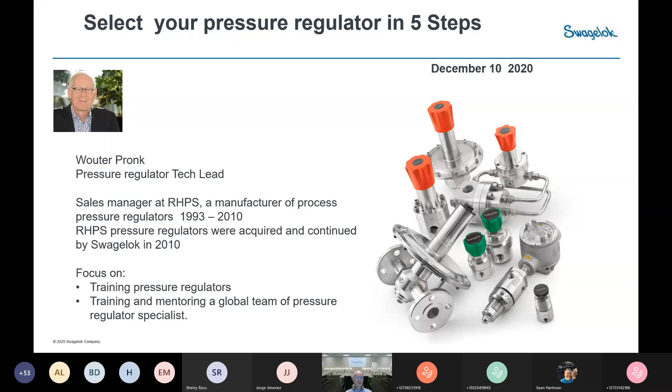Today we will talk about how to select a regulator in 5 steps and try to avoid mistakes. Step 1 is be aware of the correct process information: pressure, temperature, flow and material. So what do we want to control? Do we want to control upstream or downstream pressure? Realize the natural behavior and performance of a regulator. Don't think that we can create a regulator which is set at a certain pressure and will keep that pressure without any fluctuation, so lock-up, supply pressure effect and droop will be subject today. Select the correct loading element: are we going to use a spring-loaded regulator, a mix of both, or a dome-loaded? And a little bit of troubleshooting, filtration and safety valves.

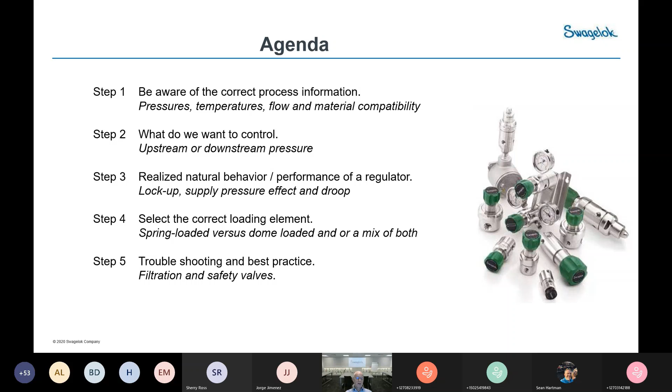What's really important is that if you want to use a pressure regulator, we start with all the information we need. Without all the information, we can't do a proper selection of a regulator. We want to know, are we going to control a liquid or a gas? If it is a gas, we must realize that a pressure regulator can handle much more flow of a gas with a low density than it can handle a gas with a high density. So think about the difference between air, nitrogen and hydrogen. Hydrogen will do approximately 3.8 times more than air. So if you select a regulator which should do, by example, 380 normal cubic meters of hydrogen, you can compare it with a regulator which can do 100 normal cubic meters of nitrogen.

So please forgive me about the units I use. I'm 100% used to normal cubic meters, and I try to use PSI as much as possible. So how do we select regulators? I like to work with flow curves, and we will talk about flow curves more and more, because flow curves are the best tool which can be used to select regulators, because basically what you see is what you get.

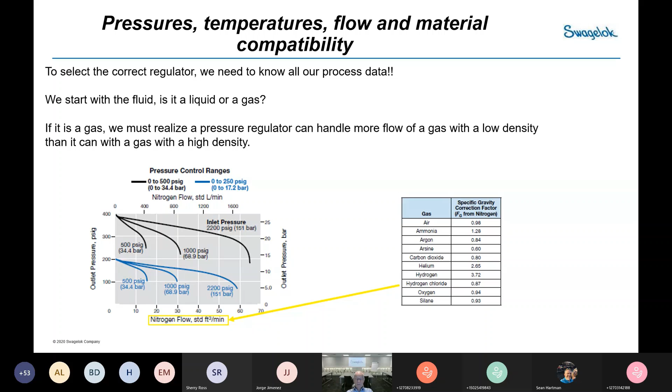What are the things we all need to know? We need to know the maximum and minimum inlet pressure of a regulator. Think about a cylinder: it will start at 3000 psi approximately, but it will decline to a lower pressure. I still have to find the first cylinder which will stay at 3000 psi, so it will decline.

And if the pressure declines inside the regulator, you will see immediately the supply pressure effect. Now what is supply pressure effect? We'll talk about it later, but if this is your inlet pressure and this is your outlet pressure, if your inlet pressure drops, your outlet pressure will go up.

So it's important for us to know the outlet pressure and how accurate it must be. This is to select the correct diaphragm size. Is the outlet pressure also related to the flow capacity we need? So do we expect that the outlet pressure is the same at all flows - the minimal flow, normal flow, maximum flow? Sometimes the specification of a process is given in the minimal, normal and maximum flow.

We also need to know the preferable flow the process needs. So is it given in standard liters per minute? Is it given in normal cubic meters per hour, in standard cubic feet per minute? Or maybe in a mass flow. In a mass flow, we recalculate it into volume flow, because that's where our calculations are based on. So in liquids, we like to work with liters per minute, because it's not compressible.

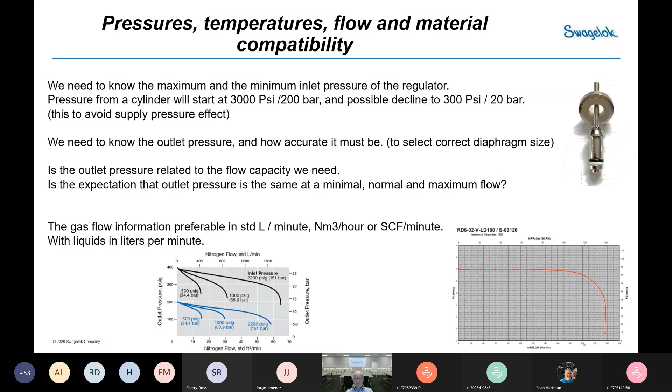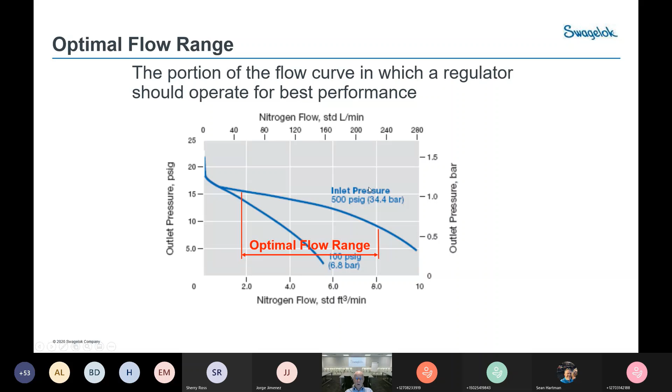So thinking about the flow curve, where do we want to be in the flow curve? Which regulator can we select? If this is a typical flow curve, this is the flow, and I like to be in the most horizontal part of the flow curve. So in this part, I don't want to be in the first part where we see the lock up, to be explained later, and I don't want to be at the end of the flow curve where we are in choke flow. That's not the place to be. I like to be in the middle flat section.

So talking about a flow curve, how do we select it and how does it work? At this side of the X we see the outlet pressure given in PSI. This side we can see it in bars, and believe it or not, in Germany the bars are at the left side and the PSI at the right side. On top we see the flow in normal cubic meters per hour, and at the bottom side we see the flow in standard cubic feet per minute.

Really important to know, these flow curves are made for or with nitrogen. So on our flow test benches, we work with nitrogen - we have no flow test bench to make the flow curves in hydrogen. So in a flow curve you see several lines, which are the flow curves.

So if I want to select and to see if a regulator I want to use can do the job, I have to find the correct flow curves. You see a lot of lines in this flow curve - maybe confusing, but it's not that difficult. So I just want to start an example. So what is the pressure drop?

So if we start using a regulator and there is no flow, and we increase the flow from 0 to 150 normal cubic meters per hour, what will happen with my outlet pressure? I start setting my regulator at 250 psi static situation, and the inlet pressure of my regulator is 507 psi. So how do I select and how can I see what's happening with my regulator?

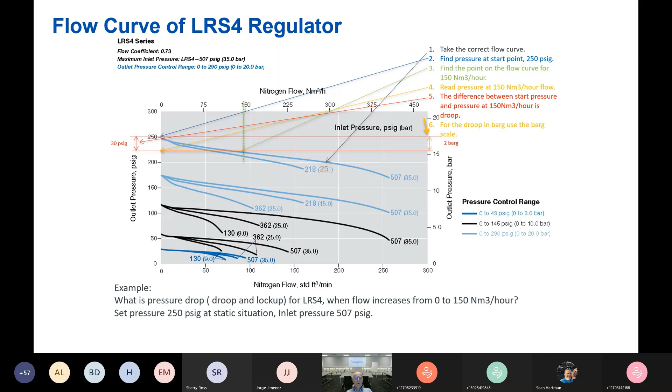So that's a theoretical flow curve. Most flow curves we show in our documentation are flow curves which are really made by a flow test bench, but on the bigger sizes we are not always able to do this. The flow curve generator will give you the opportunity to select a flow curve which is really according to your process.

How do you want to control the regulator? Do we want to control it with a diaphragm, or do we want to control it with a piston? Regulators on the low pressure are controlled and measure the outlet pressure with a diaphragm, but regulators with a high outlet pressure measure the outlet pressure with a piston.

Why is this? Because of the area of your diaphragm and all the force which works against it from the outlet pressure, there is a lot of force on top of the diaphragm. So we need to compensate that with a spring, which we use to set the pressure. If this outlet pressure is too high, we can't handle it, so we need to make the sensing element smaller. The only way we can do that in the standard regulators is to use a piston with a smaller diameter.

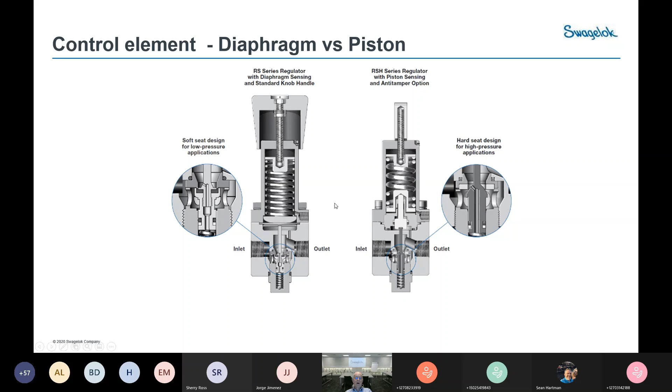So why do we use the piston, and when do we use the piston? We use the piston to control higher pressures and outlet pressures.

If I select a regulator, I prefer to have a regulator with a very large diaphragm and a very small seat - the diaphragm as big as possible and the seat as small as possible. Why? Because it gives you better repeatability and more sensitivity.

You can imagine that if I set a regulator at a certain point, at a certain process data, and there is a change in the inlet pressure or a change in the flow, it will run away a little bit from the set pressure, which you can see in the flow curves. But if we go back to the original situation, the repeatability of a regulator will show that it can come back to the original state.

And if we talk about sensitivity, it's important that the regulator can respond to small changes in the process. Think about a blanketing process where we talk about millibars or small inches of water of change - we don't want to see big changes in there. So I like to have a very nice and big sensitive regulator.

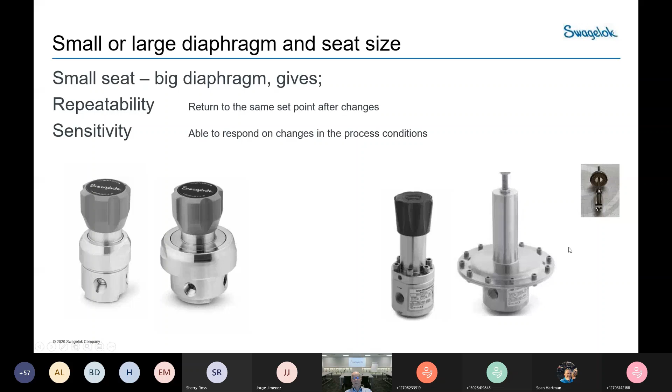So it's a standard regulator. This regulator is a standard regulator, but we have the same versions with bigger diaphragms like this one, and you see it's a big diaphragm, so we can't control a very high outlet pressure. A big diaphragm is always related to lower outlet pressures.

Temperatures - something which is really important for us. Think about an application where we reduce a lot of pressure, you will see the Joule-Thomson effect. And the Joule-Thomson effect is basically where we reduce pressure in a gas, and if there is a reduction in gas, we need warmth or heat - basically we need heat to reduce the gas.

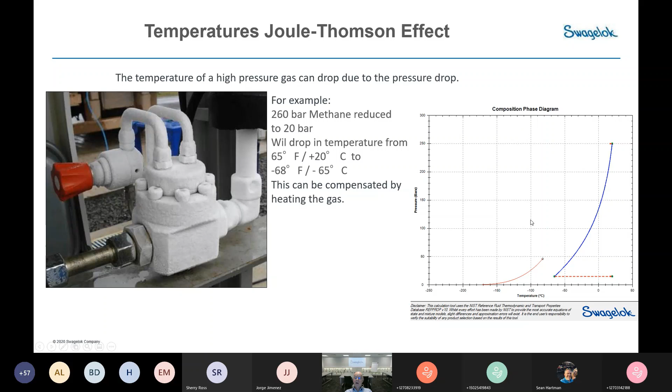So that's a lot of pressure drop. We can calculate the Joule-Thomson effect, and we can also calculate the heat we need to compensate for this.

Material compatibility is really important to select the correct materials, because in our regulators we use materials like elastomers, diaphragms, O-rings, and also several other materials.

Where do we see the issues with compatibility? As I just talked about the Joule-Thomson effect, we have to realize that the regulators must be built with the correct materials. If you really want to use a regulator in very low temperatures, maybe we have an issue with the elastomers and the polymers. We have to be sure that the fluid is compatible with the materials.

So this is a nice example where the diaphragms were not compatible with the material. It started swelling, and it was damaged.

Pressures. If you think about high pressures and big diaphragms, we have to be sure that the design is good enough for higher pressures. So compatibility does not only stop with the chemical attack of materials, but also in the situation where the materials are not compatible with your application.

What about process conditions, erosion and cavitation? I like to show this one, and I'm not really proud about it, but this customer was using this back pressure regulator in a situation with a methanol injection system, and the damage you see on this material was caused by erosion. It was only a few hours and it was already in this state. So this is a component of a regulator which was basically selected in the wrong way.

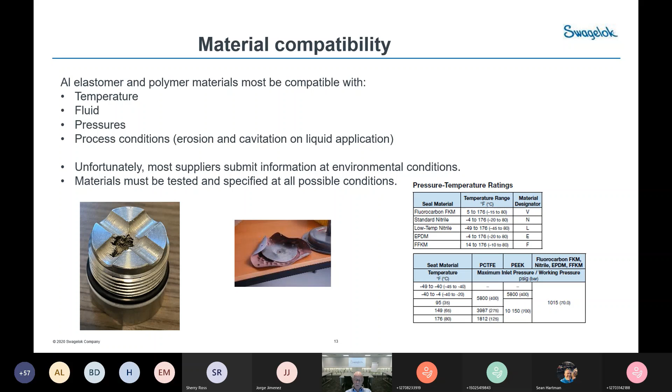So are we controlling? Sorry.

What would cause cavitation in a regulator? Cavitation in a regulator is basically caused by a big pressure drop, and it only happens in liquids. If there's a big pressure drop, you get implosions, and the implosions eat away the material. It's erosion by cavitation.

Another step, are we controlling upstream or downstream? This is a simple process. A lot of people look at the process like this - this is basically my process, and the process is asking for the maximum capacity of flow. So it's not us giving you the flow. No, the process needs a certain flow, and we need to find a regulator which can handle that flow under the worst scenario.

So if this cylinder drops from 200 bar or 3000 psi to a much lower pressure, then I have to calculate the size of that regulator. I have to size it on the worst case scenario. The same with back pressure.

In most cases we see either a pressure reducing regulator or a back pressure regulator. A pressure reducing regulator controls downstream pressure, so it's controlling the pressure in the process, and a back pressure regulator is controlling the maximum pressure inside the process. If the pressure is too high in the process, the back pressure regulator will open. If the pressure is too low, the pressure reducing regulator will supply the gas. So it's important that we know what we are controlling, and we see a lot of misunderstanding on the naming of a pressure reducing regulator versus a back pressure regulator.

A lot of people give the wrong information regarding the naming, and just by looking at the process conditions, we can figure out whether this is a back pressure regulator or a pressure reducing regulator, or the other way around.

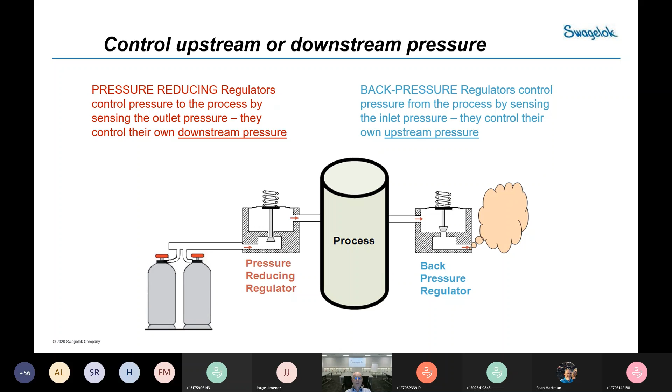Regarding back pressure regulators, I like to say one thing. A lot of people think a back pressure regulator can be replaced with a safety relief valve or a relief valve. Please don't do it. You will get a lot of chattering, hammering, and noises, because back pressure regulators are built to constantly control a pressure which is too high, so they can easily vent off a little bit and then close again. Safety relief valves have a very small sensitive element, and they open, bam, bam, and close again. So it won't work as good. Back pressure regulators work better than safety relief valves.

Now, how does a regulator work? Basically, in a regulator, you will find a control element - the seat and the poppet. The seat and poppet will open or be closed. And we measure with our load and sensing element. With the range spring, we control the force on the load on the diaphragm. And with the diaphragm, we measure the outlet pressure.

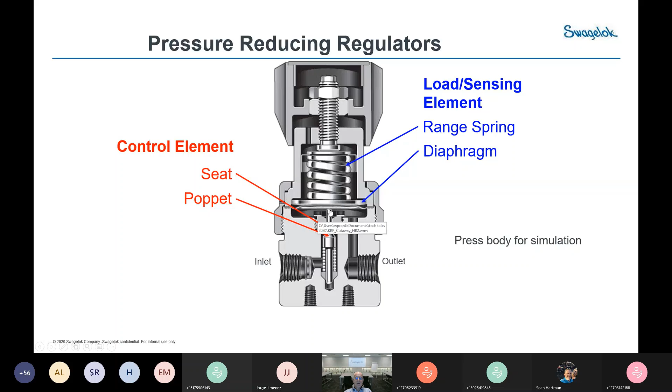So I will continue. If we set a pressure, the inlet pressure will come through the seat, and when the outlet pressure is against the diaphragm, you will try to find a balance with the spring force which is on top. And the spring force we all know about, because we screw in that knob and create that force on top. I've got a small simulation of a regulator.

So here you see an analytical regulator. You see the inlet pressure, the valve opens, there is a flow. And if we unscrew the spring, or unscrew the set knob, and so reduce the force from the spring, the regulator will be closed.

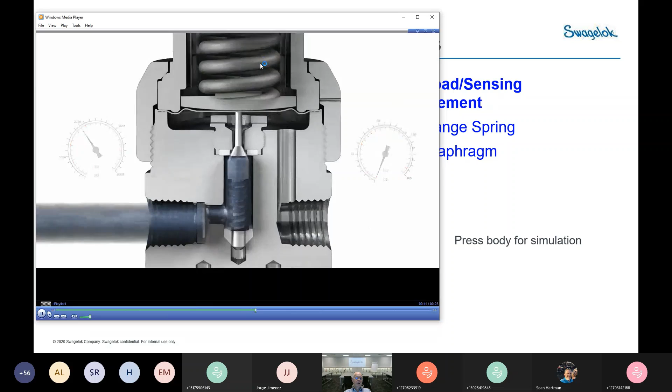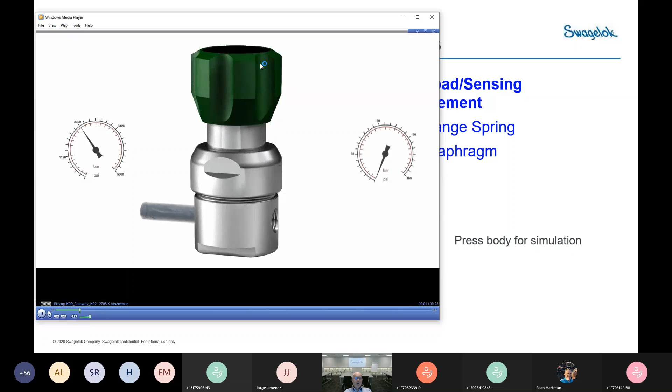A lot of people think that regulators are controlling, opening and closing all the time. Normal regulators in a constant flow situation are working at an opening of approximately 30%. So please be aware that if you do a calculation for a CV value of a regulator, please don't work with the CV values.

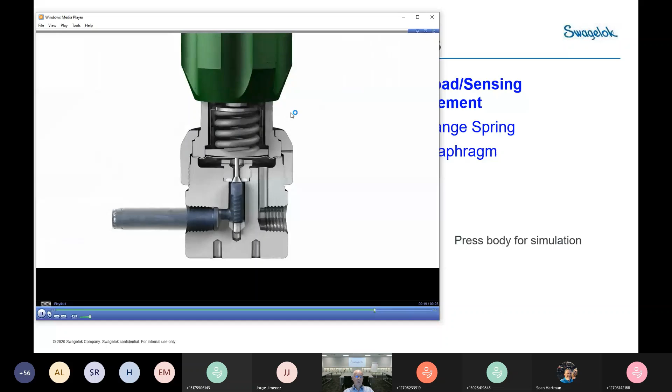CV values are just there to compare sizes of a regulator. In a regulator, we control a pressure, we don't control a flow. So if you use a flow control program, one used to size a flow control valve, and it gives you the CV value, you've got the wrong value for a pressure control regulator, which will be opening approximately 30%. So if you use the wrong program, you have to divide your value by 3 and you find approximately your CV value.

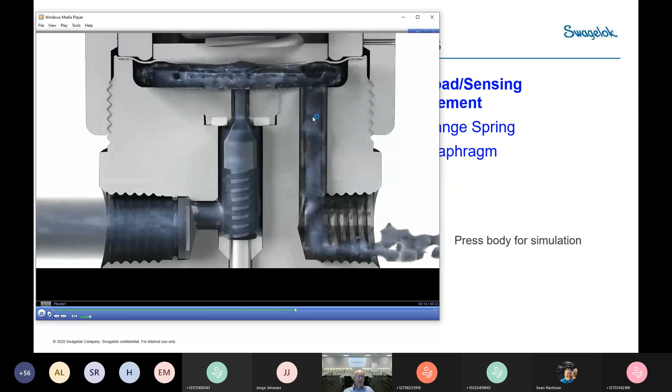In my sales life, I very often got the question: Wouter, I've got this regulator which has a CV of 1, it's not working well, do you have a better one? Because a competitor made a mistake. Then my question is always, what's the worst case scenario? So we did the calculation, and most of the time we found out that they needed a bigger regulator.

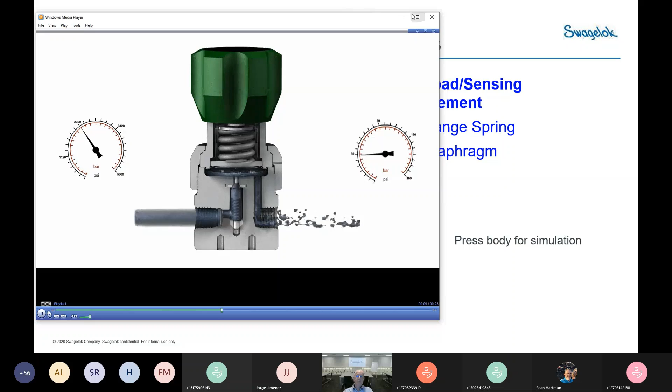So please be aware of this. In a regulator, we see basically only forces. Which forces are in a regulator? First of all, the spring force - that's the force we create by turning the knob, by compressing the spring.

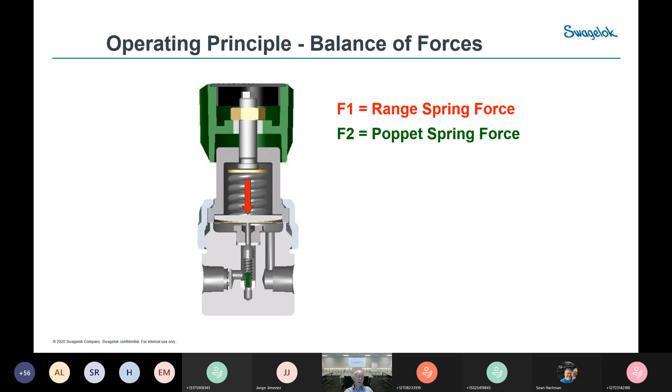Then there is a small poppet spring, and that poppet spring should be there because it's there to keep the poppet closed into the seat - just enough force to keep that poppet closed. A lot of people think that regulators have issues with leakage with high inlet pressures. Now, regulators love high inlet pressures, because that inlet pressure force helps them to close the poppet into the seat.

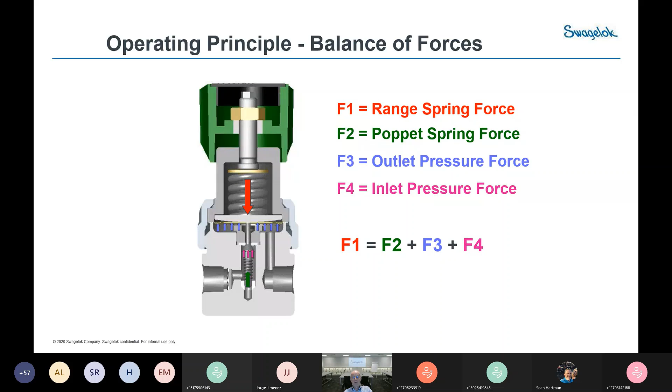So the last two forces we will find are the outlet pressure force and the inlet pressure force. The outlet pressure force is the outlet pressure pushing up the diaphragm, and the inlet pressure force is the force which the inlet pressure creates against the poppet. They all should be in balance. So it's a simple equation - if you change something in this equation, something else has to change as well.

Back pressure regulators. How does it work? It's the opposite way. In a back pressure valve, we still create a force on top of a diaphragm. This is your process which you like to control. If the pressure is too high in this process, it will work against the diaphragm. The diaphragm will be pushed up against the spring force based on the set pressure. It will slowly flow away to the outlet. There will be a balance again, and the back pressure regulator will close.

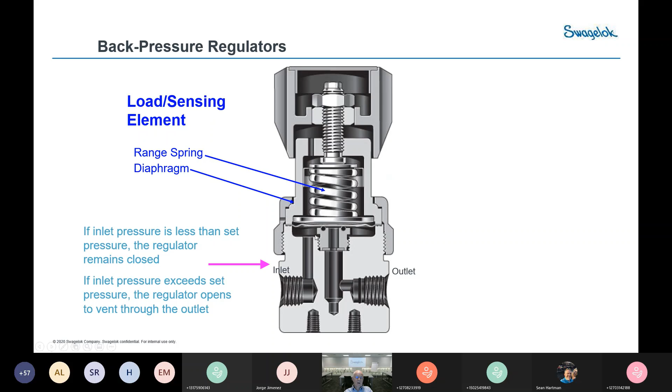Performance of a regulator. We talked before about the flow curve, and again I like to go into it. The first part of the flow curve is the lock-up zone. We will talk about that. We've got the second part, which is the droop area, and the last part is the choked flow.

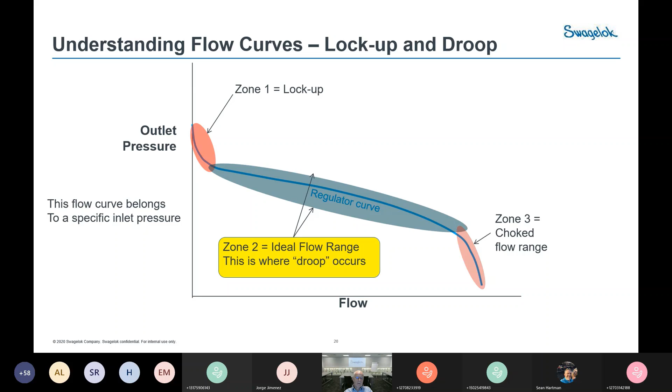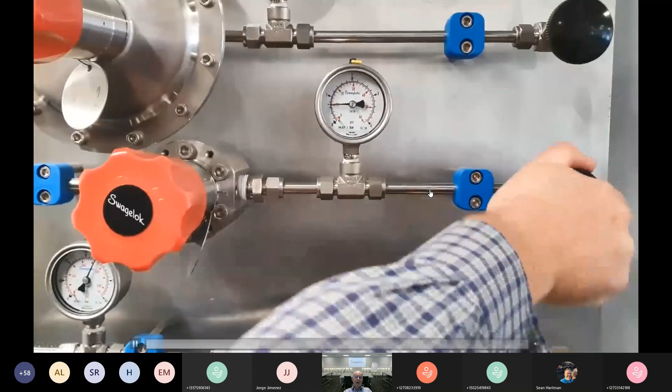If I open this valve, you will see that the pressure is declining. I selected the regulator with a nice lock-up so that you can clearly see it. So I'm going to open my downstream valve. You'll see when I go from static to dynamic, I will see lock-up. This is the lock-up effect. Each regulator has it a little bit. Do we like it? No, we don't like it. You can avoid it by selecting a different regulator, but this is the effect which we call lock-up.

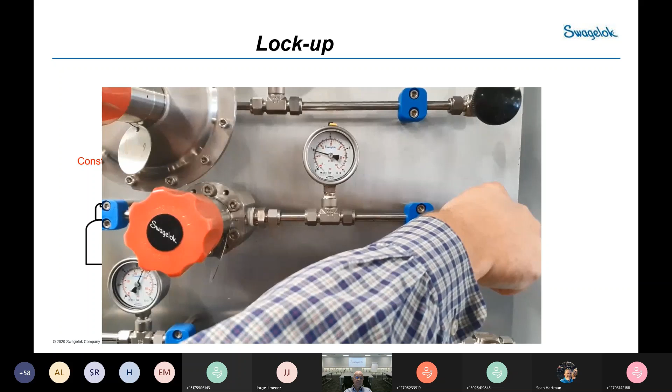Where does it come from? Again, I go back to the forces. The lock-up comes from the forces created by my poppet spring, the F2, which is created by my F4, that's the inlet pressure force. So the higher the forces, the more force you need to open this valve. So the more lock-up you have.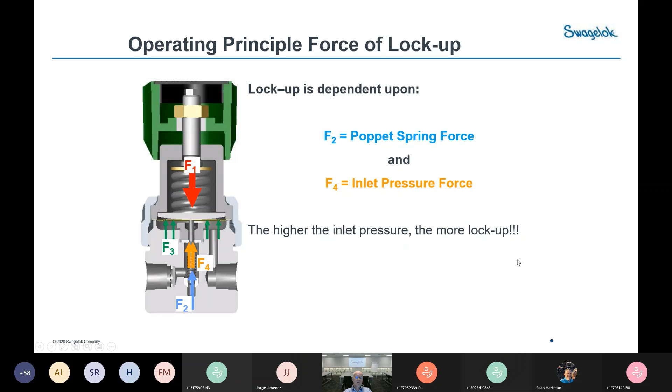Then another effect, which I also talked about, supply pressure effect. If your regulator is seeing a declining inlet pressure - so again I go back to my pointer, which unfortunately I can't use for this kind of training, but I can use it for other purposes - so if my inlet pressure drops, my outlet pressure goes up. In the example I will show you on this panel, the inlet pressure declines from 34 bar to 6 bar, and my outlet pressure increases from 1.6 to 2 bar.

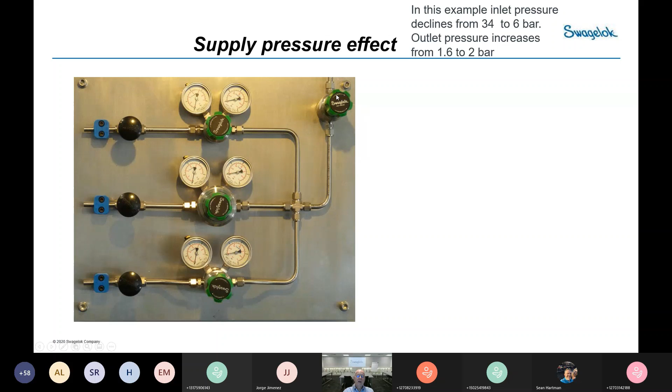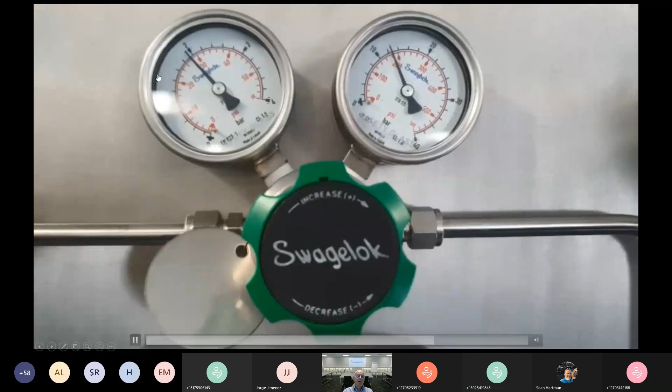The outlet pressure. So I will show this in this example. So what we're going to do? This is my regulator. It is set at a certain pressure, set at 1.6 bar. I decrease my pressure with this inlet pressure regulator, and we will see that the outlet pressure goes up. So the inlet pressure is decreasing. You can see that my outlet pressure is increasing.

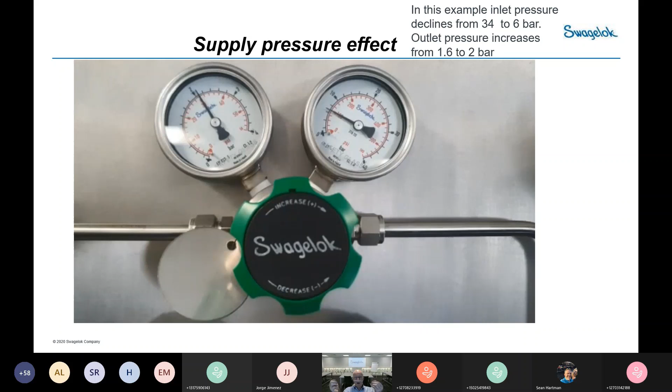What is changing if my inlet pressure decreases? If my inlet pressure decreases, that's basically my F4. So if my F4 decreases, that force will go down. I'm not touching the knob, I'm not touching my set spring. So something else has to go up. So what can go up? My F3. So basically this equation again explains the balancing of forces inside the regulator.

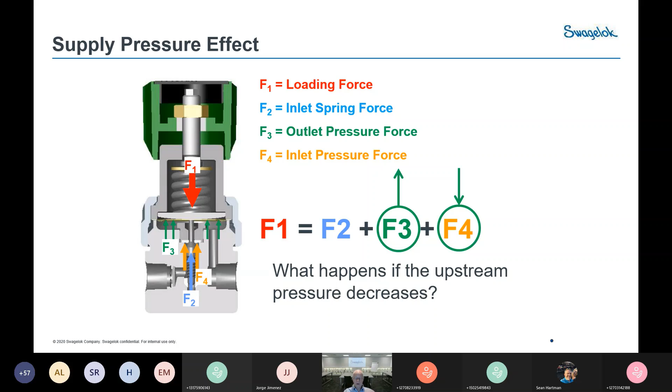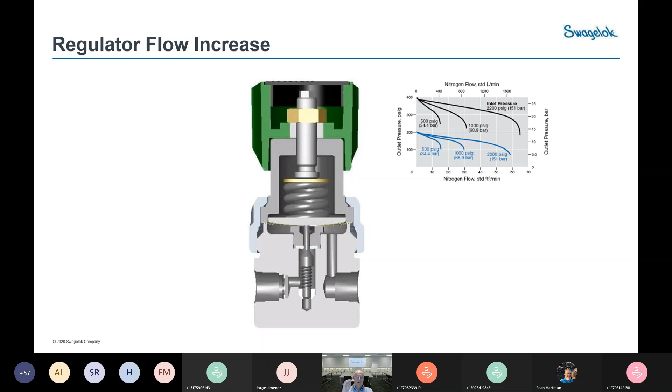Then the other effect: regulator flow increases, and what we see is droop. The droop can be seen inside my flow curves. So if we go from this point to a point further on the flow curve, what is happening inside my regulator? My poppet is closing, but the more flow the process is asking me, the more I have to open my poppet. So if you look at my poppet, it opens away from the seat and my spring gets longer. If my spring gets longer, it loses force.

Because of this force I lose at that spring, I also will see the performance of a regulator that we call droop. And again, going to the equation, my spring gets longer, so I'm losing force on my F1. So what is changing on the other side? That's basically my outlet pressure force.

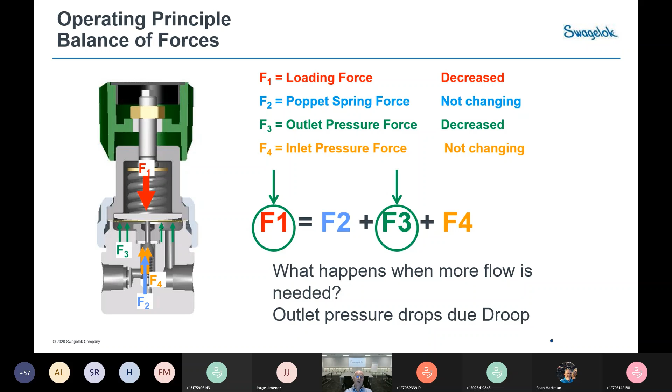So basically, a spring inside the regulator is the most critical part, because if that spring is selected the wrong way, you will see more droop. This is basically the biggest mistake a lot of people make.

If they select a regulator, they look at the part numbers and see the pressure control range. If you want to control 6.8 bar, select that regulator, don't select the 70.2 or the 34. I've been with customers who were proud to tell me they standardized on one regulator from our factory, and they selected one regulator from 0 to 150 bar, controlling all the pressures inside the plant with that single regulator. They were not happy with the performance.

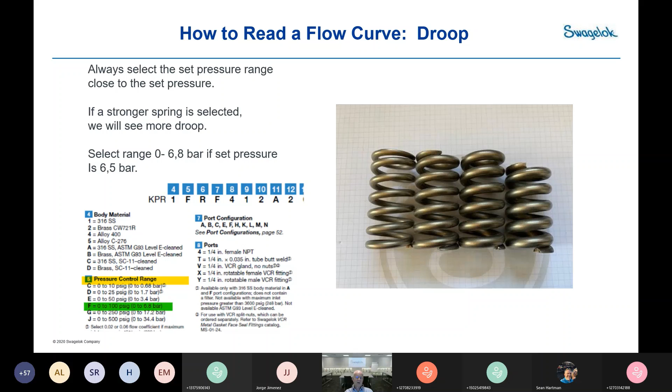I can explain why, because they were looking for a light spring but were using a strong spring instead. With a strong spring you will see more droop and more side effects. So please select your regulator exactly according to your outlet pressure range.

Your loading elements - a lot of people select regulators based on the spring, because most people know spring-loaded regulators. We've been discussing those, but you can also use dome-loading regulators. The only thing a regulator does is create a force on top of a diaphragm.

You can also create a force on top of the diaphragm by filling this area with pressure, with a compressed gas. If you create a force with a spring, you can also create a force with this gas in here. And basically, if you create a pressure in here of 5 bar, so in this dome 5 bar, you will get 5 bar out.

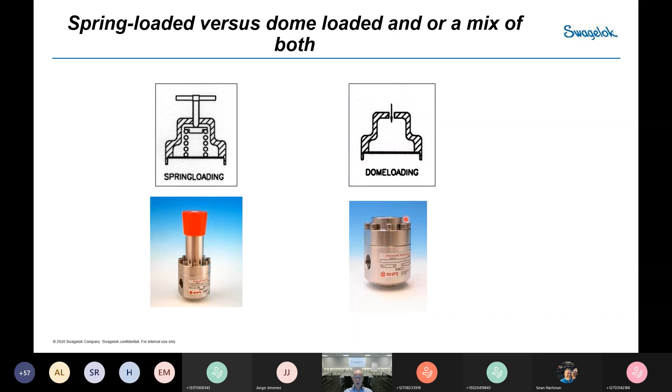So this is a typical example of a dome-loaded pressure regulator. We create a force on top of the dome. This is a typical example of a nice big dome loader. This is the inlet side, the other side is the outlet. We take the pressure from the inlet, we reduce it with the pilot, it goes into the dome. Because we like constant outlet pressure, we bleed the pressure back into the system.

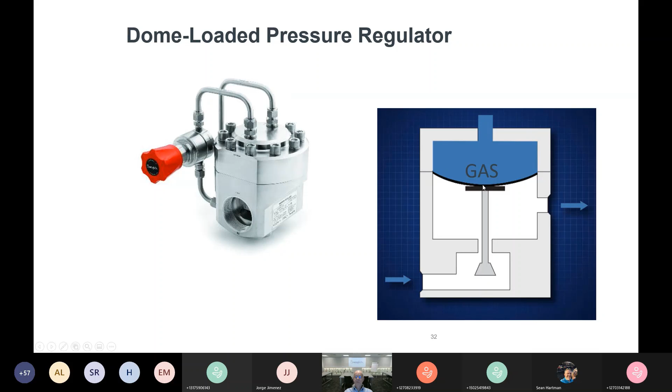So what is the big advantage of using a dome-loaded regulator against a spring-loaded regulator? Like I said, I like to see a big, nice diaphragm. The ratio between the size of the diaphragm and your seat also influences your supply pressure effect - so as the supply pressure goes down, outlet pressure goes up.

So with a dome-loaded regulator, we don't change the diaphragm size - it will always be the same size. We don't go to a smaller poppet or piston. So over the full set pressure range, we have a nice, big, large diaphragm, which gives us a low supply pressure effect. We also have no spring, so we have lower droop.

And it's possible to do remote control. Think about a situation where you want to control pressure far away from you - you can work with an electronic pilot on top. The people online at Proportion-Air know what to do with remote control. So this is the main reason to work with diaphragm and dome-loaded regulators.

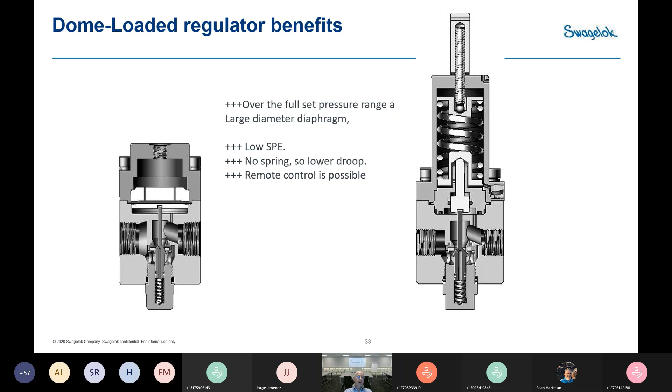Another regulator we supply is a mix of dome-loaded and spring-loaded. In this regulator we have a spring, which we call a bias spring, and we have a dome, so this area. What you can do with this regulator: we have an inlet, we have an inlet pressure, we have an outlet pressure.

The outlet pressure can be controlled first of all with a constant bias. So if we set this spring at 5 bar, there will always be 5 bar coming out of the regulator. But with an external source, for example in a mechanical seal, we can take pressure from a pump, and that pressure from the pump can go inside my dome.

So if I always want to have, say, 2 bar more on top of my seals, I can work with a differential pressure regulator to achieve that. So this is a mix of dome-loaded and spring-loaded.

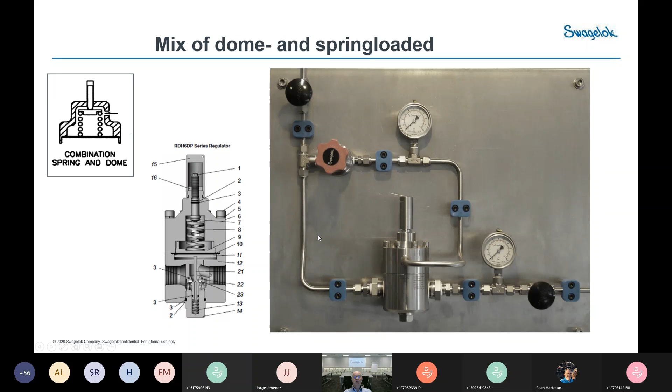So, best practice - for a lot of people this is common sense and daily business, but I like to emphasize this part. A pressure regulator is a control element. If a pressure regulator is controlling high pressure, like 3000 psi down to 1000 or 100 psi, the risk of having a small leakage inside is always there.

If it's brand new and tested in the factory - all our regulators are 100% tested when they leave the factory, they must be bubble tight. But even during installation or commissioning, a lot of dirt is still in the system. The dirt comes into the seat and can damage your poppet and your seat.

So in case there is leakage, what you call creep, it's possible that your inlet pressure is leaking through the regulator in the downstream area. During normal use you will not see this, but if you stop a process during the night and keep your full inlet pressure at the regulator, and you don't control or put safety devices in your downstream area, due to creep and leakage it's possible that your inlet pressure becomes your outlet pressure.

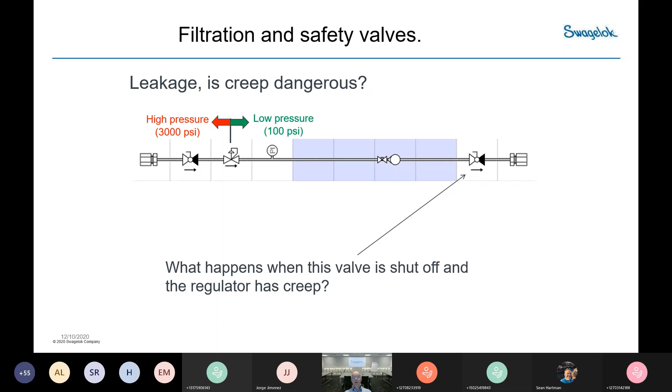So do we like this? No, of course not. But we have to realize that the pressure reducing regulator is not a shut-off valve, it's a control element. So what improvements can we make?

First of all, filtration is I would say the best protection for a pressure regulator. Having a relief valve installed in a downstream system is sound engineering, fully common sense, but we don't see it very often. So install relief valves downstream, and the best thing you can do is, when buying a regulator, also buy spare part kits. So if you have a spare part kit available and you damage your seat, you can replace it.

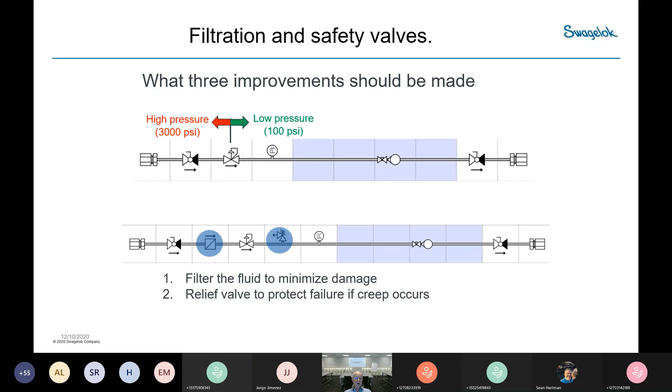This is basically the thing I want to talk about today. So if you select your next regulator, be sure that you have all your process information - that you know your inlet pressure and your lowest inlet pressure, that you know how accurate your regulator must be, that you realize are we controlling upstream pressure or downstream pressure? Do I need a pressure reducing regulator or a back pressure regulator?

Since today you know about droop, lock-up, and supply pressure effect. You like to see the regulator having a constant flow curve, but there will always be a little bit of droop or a little bit of effect. So do we need a spring-loaded regulator? Can we work with a spring-loaded regulator, or do we need a dome-loaded regulator? Or maybe a mix of both?

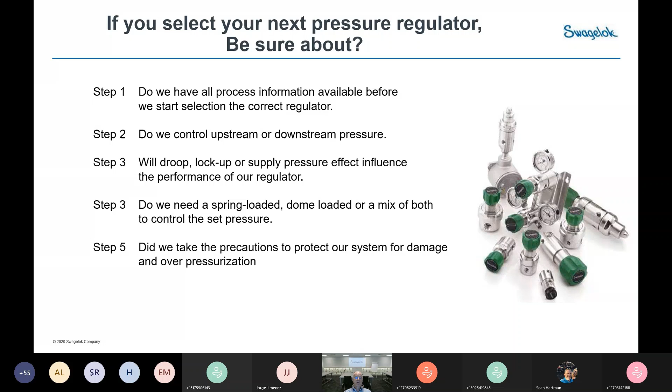And then step five, did we take all the precautions to protect our system from damage and overpressurization? So these are the steps, and if you take them you can be sure that your next regulator will be an absolutely good choice. So I wish you all the luck in selecting your next regulator, and thanks for listening to me.

Oh, thank you, Wouter. And we can address some questions now. Yes, of course.

Okay, well, to give you recommendations for when using oxygen - oxygen is, let's say, a scary medium, and at low pressures, low flows and low velocities you can select stainless steel. But if you really have high velocities in your line, you make a design mistake. We have some regulators which are made from brass that can be used and are approved for oxygen - brass material with Viton seat and Viton seals. That's the one you need.

Okay. Any other questions that have come in, Mike? I do not see any other questions. Yeah.